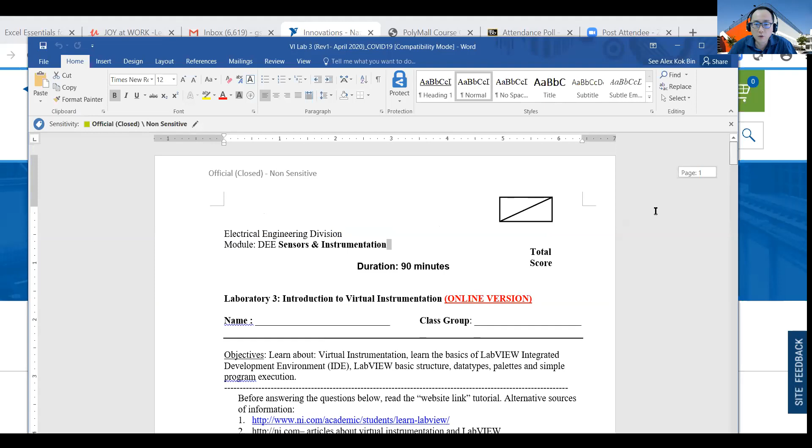I think Mick and who, right? Mr. Ho. Okay, you all just came in, some of you just came in, 2 of you. Yeah, let me mark your attendance first. You have to do your attendance for Mr. Ho and Mick. Okay, mark present. Okay, Mr. Sharu just came in also, just a moment, Mr. Sharu. Okay, Mr. Ching is not here - Ching Kok Hong, are you here? Mr. Ching, not here, Ching Kok Hong, not here, okay. This Mr. Ashraf also not here. Ashraf, okay, never mind.

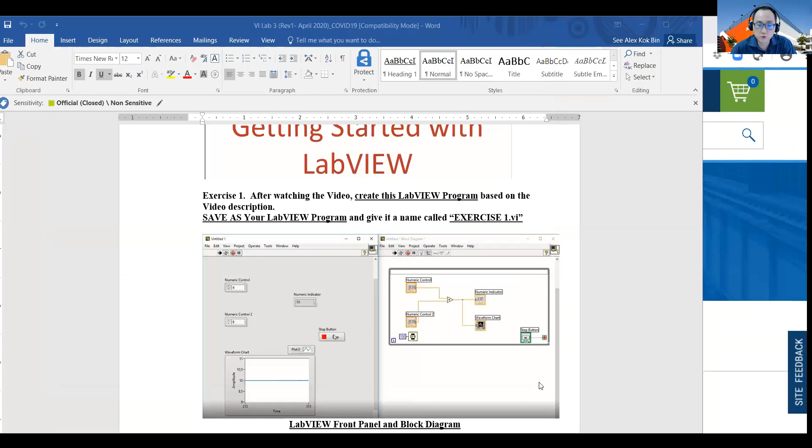VI stands for virtual instrument. Click on this thing called New VI, the first one. Click on this. VI stands for virtual instrument, just for you to note.

I think you should be able to see this and this. You see two windows, right? I believe you all see two windows - one a sort of gray window, and another one a white color window. Let me minimize my lab sheet to make it cleaner, and go to the back and minimize this one first. So you all see something like this, I believe. Am I right? I'll bring down the message box. Okay good, so you all can see.

Now let me give you a run-through introduction. This thing that I'm going to type here, you don't have to do this now, just watch first. You can open up first. At the same time, if you can, put my screen at a small area so you can see. Then open up your system - I'm using two screens, sorry. I know you're looking at your laptop, maybe you've got something different, but anyway I'm looking at two screens. So just to introduce, on this side here, right.

Maybe before that, VI stands for virtual instrument. Just to share with you, virtual instrument is a program. The reason why they call it virtual is because later you will understand that you can create the LabVIEW front panel, almost mimicking an instrument, which is very, very powerful. Now, of course, this is just for reference - what is LabVIEW? LabVIEW is an acronym, it stands for Laboratory Virtual Instrument Engineering Workbench.

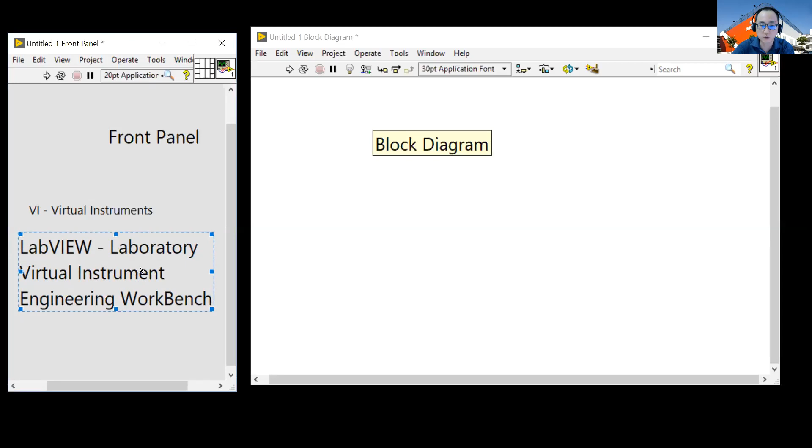In fact, I know some people in the chemistry lab, they use LabVIEW to do some automation and data acquisition. You know, now government talking about robotics, automation and so on. So it's also one of the very powerful tools.

So VI stands for a virtual instrument. You will see in a short while why virtual instrument.

Now, what you see on this screen, the gray one, if you look at the top it also tells you already, right? It's called Untitled One, and this is a front panel. On this side here is called a block diagram. You see, the white color is called the block diagram.

So maybe if you can follow me a bit, okay, let's do this. Can you right click on your mouse? Now what you can do is go to Windows, and do tile left and right. Can you do that? Maybe you do that.

I don't want to do that now because for myself, when I do that, the top part of the window will be blocked by my Zoom. That data I cannot minimize, it's a bit troublesome. So I thought I don't do it. You can do that on your side.

Okay, go to tile left and right. Click on this one. Go to Windows, tile left right. So you have the front panel on the left side and the block diagram on the right hand side, side by side.

Now some people like, you can tile up and down also. You all can try. I'm not going to do that, but you try that. You can tile up and down, so you got one at the top, one at the bottom.

Okay, so now in LabVIEW, there are three main palettes. Let me introduce to you first. So these are the terms that you need to be familiar with.

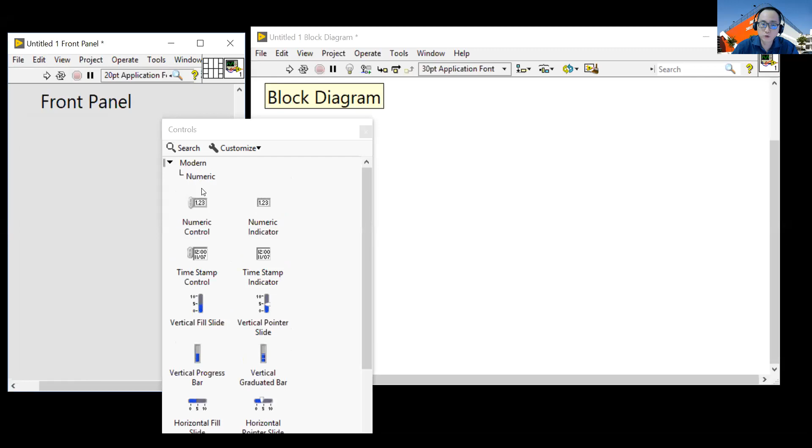So for example, okay, let me release this first. Okay, what do you all see? Can I ask you a simple question? Can you all locate for me a thermometer?

Go to the first palette called numeric. Can you locate one thing called thermometer? I need to check something first. I want to make sure that you are all seeing the same thing. So you drop a thermometer, right?

Now tell me, if possible, if you drop the thermometer right on the front panel, now what do you see on the block diagram? Do you all see this? Do you see this? I call this, you see this object, right? Okay, I call this A.

Now, or do you see icon? Or do you see this?

Okay, maybe you all put in your chat just to make sure. I believe you all are seeing B. That means the icon. Are you seeing icon B, right? Icon, right? This is called icon.

The thing that you see now, this thermometer shape, is called icon. Am I right? Just throw your comments inside your chat. Are you all seeing icon? I believe so. Icon, right? Is it correct? Just type yes if you're seeing icon.

Okay, let's help you set up a bit. Currently the default is checked as icon, which is not very good. In LabVIEW, we try not to see icons because later on you'll need space.

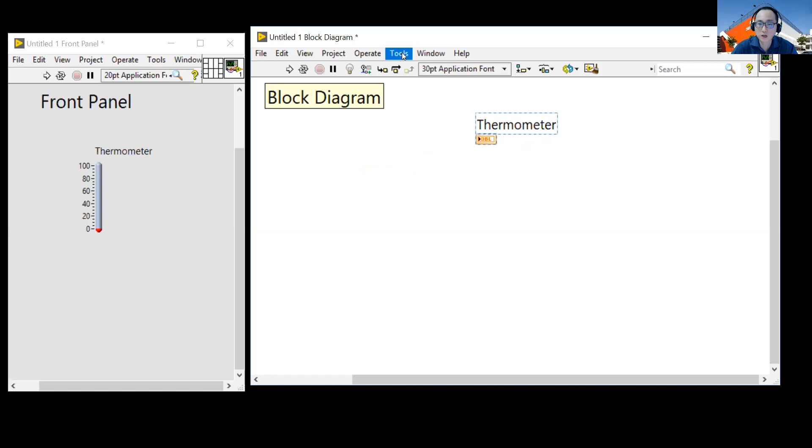So do this together with me. Go to Tools, then go to Options, right at the bottom there. There's this thing called Options. Tools, then Options, click on it please.

If you're there already, you'll see this window pop out. Go to block diagram. Now notice that for this setting, mine is unchecked. I need this option, called 'place front panel terminals as icons' - I want you to uncheck that one.

Go and uncheck this option, 'place front panel terminals as icons'. Okay, uncheck, done. If you're done already, please give some response in the chat - maybe put done, yes, or Y.

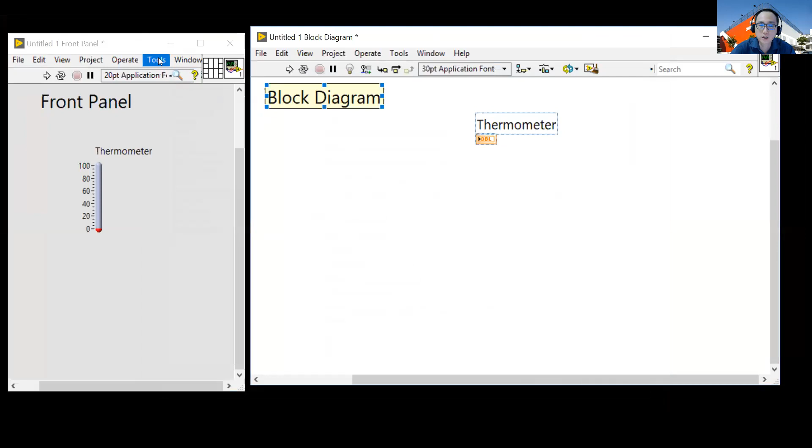Do we need to go to block diagram? No need, go to Tools on the Windows side. Let me show you again - go to Tools, yes. This is block diagram, right? Yes, correct, you can go to Tools here, then Options.

What category do you select on my screen? Look here. Oh, block - okay that is the block diagram category, you're right. Go to block diagram, then uncheck the first option. Okay, good.

So the program will auto save every minute. Make sure you do these two things for now. If that's okay already, just click OK to save the setting.

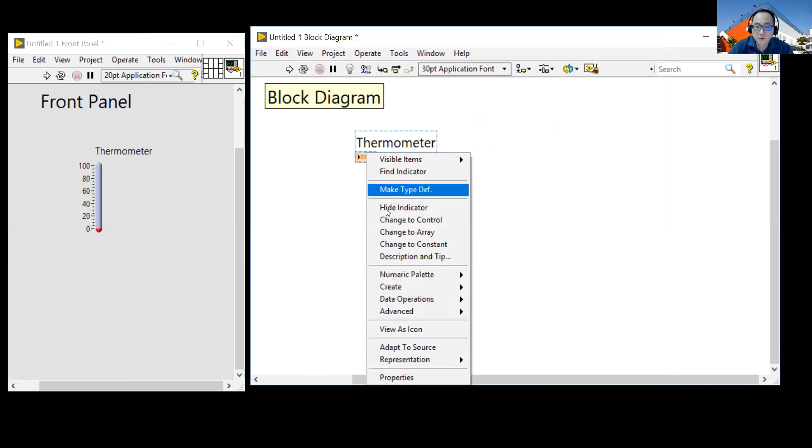Click OK, done. Now, some of you had your first thermometer set up like that - don't do anything, just watch further. Now I want you to put another thermometer. Go back to the front panel, right click on your mouse, go to Numeric, and drop another thermometer indicator.

Drop it, and you should see it just like before, but now in a different area. Make sure everybody sees this first, because this setting is quite important - although very basic, it matters later, because as your program grows you'll need the space.

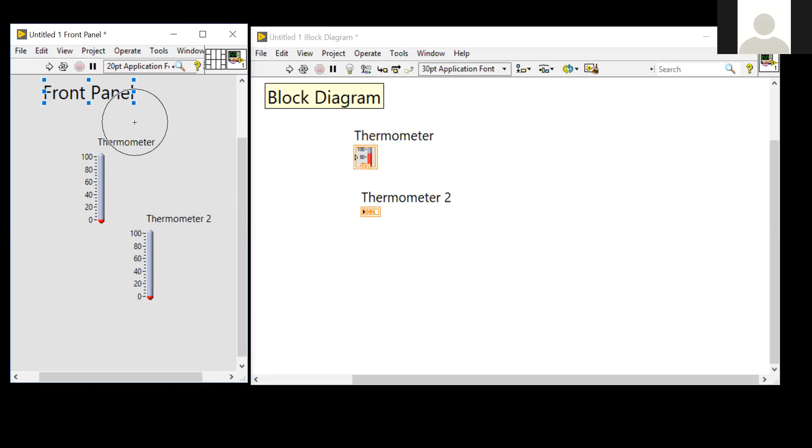Okay, drop another thermometer. Go to front panel - if you don't have this, it's just a normal thermometer. Right click on your mouse - this will launch the control palette. Go to Numeric, then go to Thermometer, click on it and drop it inside the front panel.

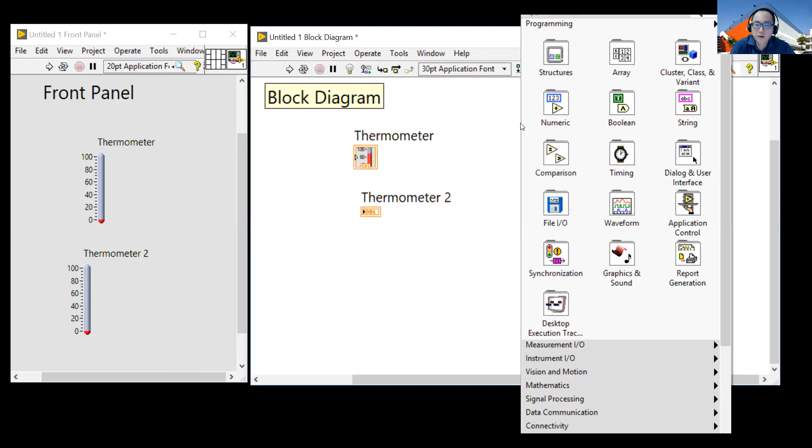Don't have it? I think it's at my block view - not at the block diagram, it must be at the front panel. Right click. The block diagram is a different thing - if you right click while your mouse is at the block diagram, it brings up a different palette called the function palette.

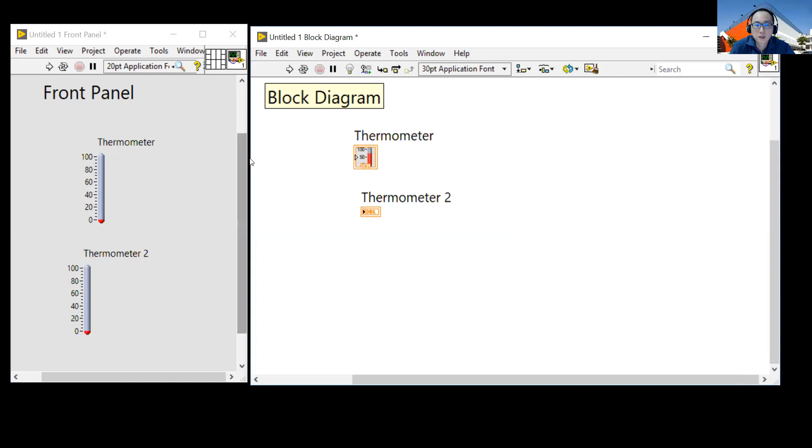But what we want is the front control palette, because whatever you do is all at my block diagram. Where's your front panel? Go to Windows, tile left and right.

Go to Windows, tile left and right - try that. I did tile left and right, but I only see my thermometer as DBL. Then the front panel is the normal thermometer we see, the one under Numeric there.

Maybe look at my screen. I'm looking at your screen. Any other people, anyone got some issue? Mr. Ashraf, are you there?

Let's wait for a few seconds. Okay.

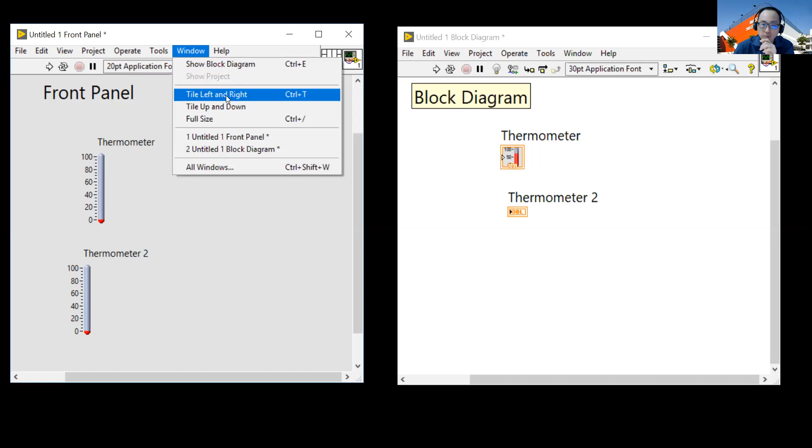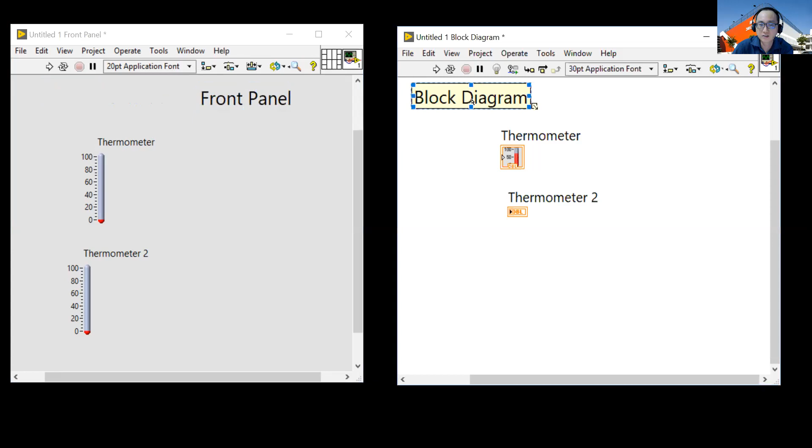You need to see your front panel. Go to Windows, tile left and right. You should see the front panel. This thing, don't worry about these two texts here, it's not supposed to be there. What you see should be blank like that.

I typed the letter into it. Can you see now, Miss Lee? Mine doesn't have it. I do. Mine is different from yours. You want to share your screen? How do I share? You do it.

You can show it, but you'll be sharing to everybody. See, because I really cannot do anything. Okay, you share your screen. How do I share from here? At the bottom there's one green colored thing called share screen. I shared it, but where is the view? This is the one, you see?

Do you see it? Do you see it? Okay yeah, what you need to do - I can see your screen.

Okay, can you go to Windows? Can you click at the top there, Windows? At the top, the menu bar there. Front panel or block diagram? Doesn't matter, either one. Go to Windows, tile left and right. Move your mouse to the...

Are you using two screens, or are you using one computer? I have one computer only. One computer, then you should be seeing all together. Go to Windows, go to Windows at the top there. Yes, tile left and right, Control T. Tile left and right there. Control T, yes correct, click on that one. Yes, click.

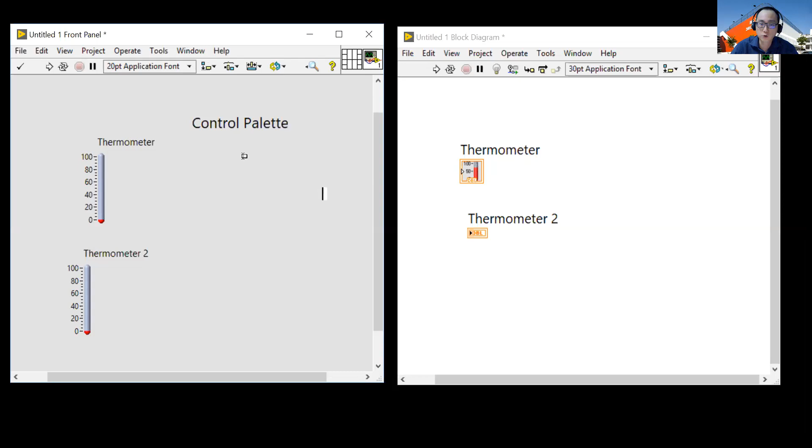There are only 3 tools, 3 palettes you need to use in this LabVIEW. This is called the control palette. To get the control palette, right click on your mouse when you are at the front panel.

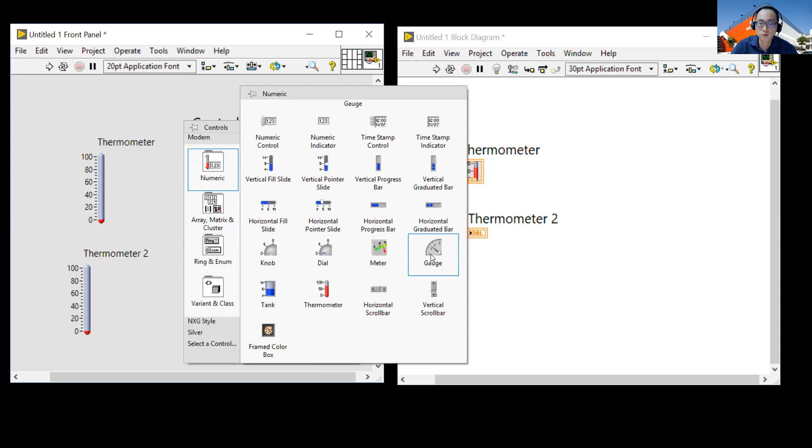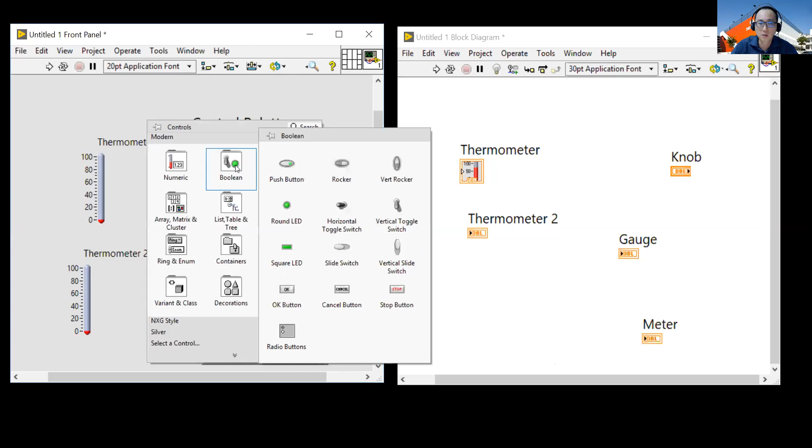What's the purpose of the control palette? It's for you to drag and drop objects. For example, I can go to numeric and drop things like knobs, or maybe a meter. I'm just randomly dropping some things. I got switches, I can put some switches, and so on.

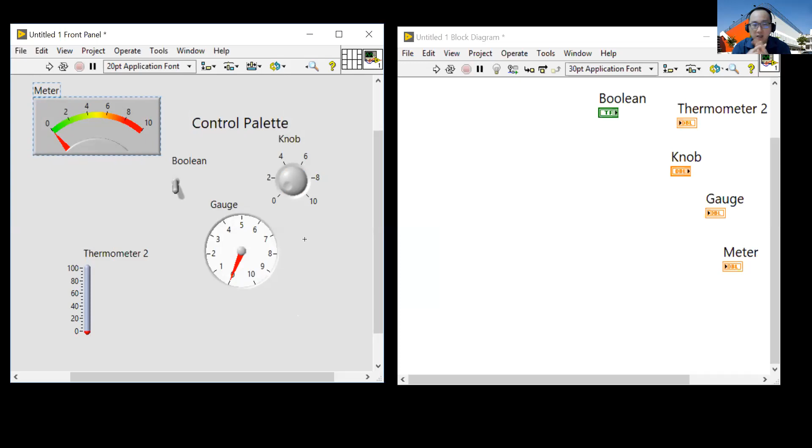When I drop these objects on my front panel, correspondingly that object also appears in the block diagram, with the same name as the object on the front panel. This mimics an instrument. On the front panel, you can put all these things to actually mimic an instrument. I believe at work you all use some kind of instrument, and the most common one is the oscilloscope. There are many other types of instruments we use.

Now what is the function of the block diagram? If you right click on it, I need your help. Can you right click on your mouse? On the block diagram, right click and you will draw out this thing called the function palette. Just right click on your mouse, and you will see various tools that are graphically available.

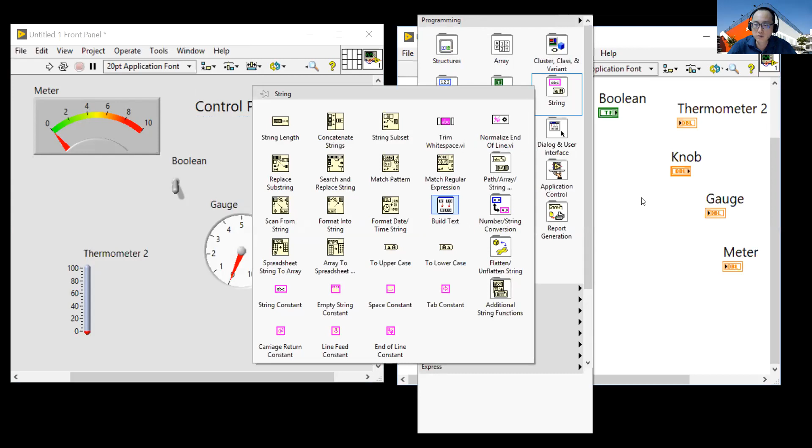I think the nice thing about LabVIEW, as compared to other types of programming languages, is that it's very simple and graphical in nature. It's very appealing and easy to use. Later you will see why.

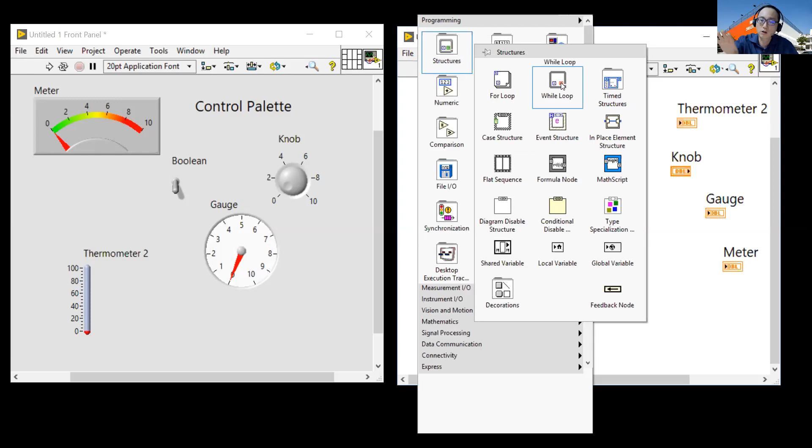Now I have all the different structures like loops - you've got the for loop, while loop, case structure. We may not have time to do everything, but we will do some of the more important ones. Of course there are also third-party add-on libraries if you need to use them. For example, if I want to connect to an instrument, maybe a flow meter, I can just download the driver, put it inside here, and then straight away connect and use it. Very, very rapid.

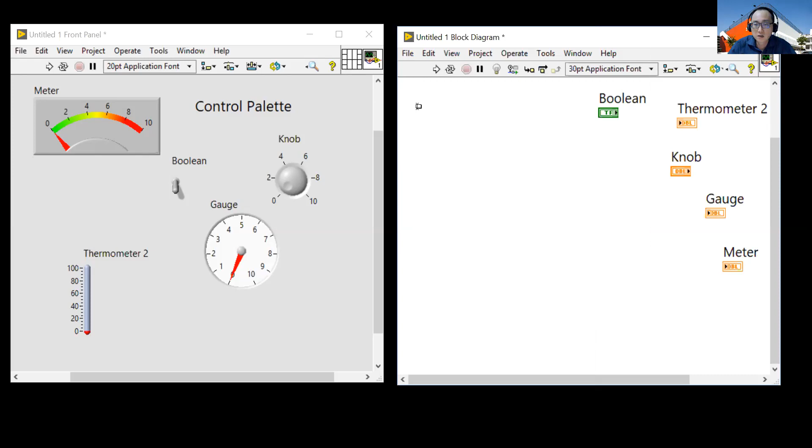So the next thing I just shared with you was this thing called the tools palette. Now let's see - I just randomly dropped the objects here, all these are random, so maybe I'll just delete them first.

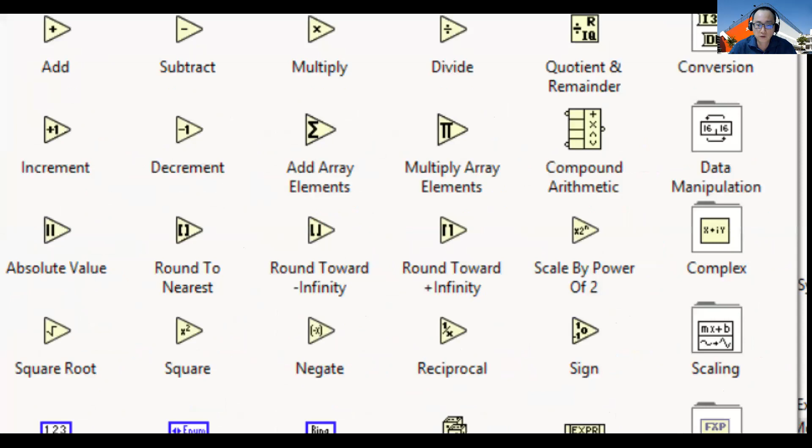On the function palette, you've got all the different functions - structures, arrays, and so on and so forth, and the arithmetic. You notice that the functions are all already there, a whole bunch of them. You can do all the different things that we need. Most of the time, your engineering problem can be solved with the tools that are there, and you can add on tools also.

So this is the tools palette I showed you just now. In order to get the tools palette, you press the shift key and right click on your mouse.

Let's maybe do something simple. Can you help me, students - can you drop for me this thing called the for loop? Can you look for this for loop? Do you all see this palette? Can you all see this thing? Help me maybe drop a for loop - just drag and drop one for loop, something like this.

Okay, you will put this for loop, right? Let's try a simple one - maybe a for loop, this is a for.

Now you can always do some basic things. There's this very useful thing called the question mark - do you see this yellow question mark? This is called the context help window. Can you click on that little yellow color window? Click on this, then mouse over to the object that you want, and this context help window will pop up. If I click on this, then mouse over, it will explain to you what this for loop is.

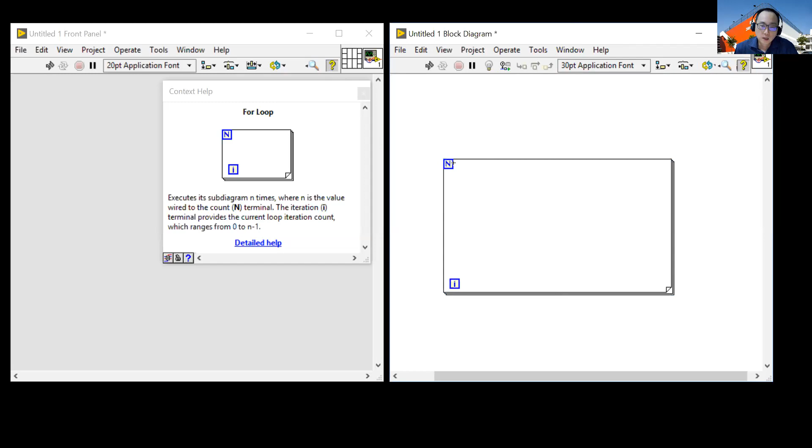Of course you can drop other objects too - maybe now we drop another structure called the while loop. Drag and drop it. When you mouse over here, you can click on the detail help if you need to. Click on this, while loop, and it will explain to you what this loop does. Let's see if I click on it, it will launch.

Okay, wait a while, it will launch. There, okay, so I show you, this is what I did.

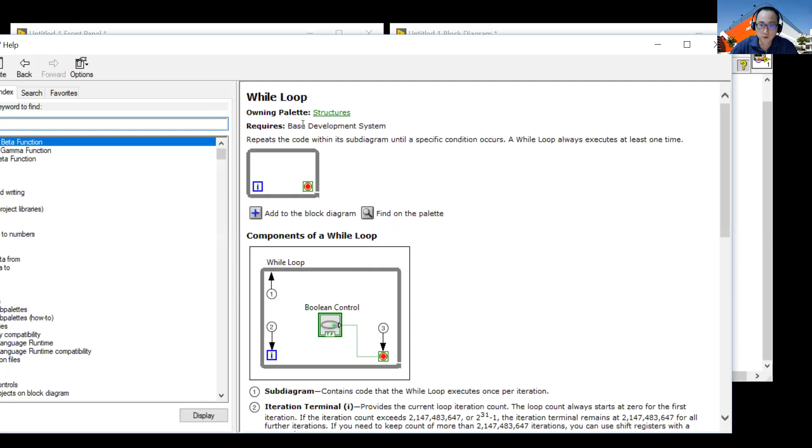I click on the detail help, so he explained to me, okay, what is this thing. So if you can navigate slowly, in your time, you can see, he explained to you.

This is a while loop, right? Now, the while loop has this thing called the iteration terminal, the I - that tells you how many times the thing runs. And then there's also this thing called the condition terminal. In order to stop this loop, you need a button, a stop button, for example.

So maybe, okay, this one you can take a look. So let's say, for example, this while loop. I can close the context help if I don't need to use it.

Okay, so I'm going to... now, let's say, when you have this while loop, you can put this while loop here. Now, let's also right click - can you right click on your mouse at the block diagram here? Now, let's go to numeric.

Okay, maybe I want to do very simple things. I just want to add up two numbers. So I need your help - go to numeric, go to the plus, go to the add function. Select the function and drop it inside here. Then go to visible item, turn on the label.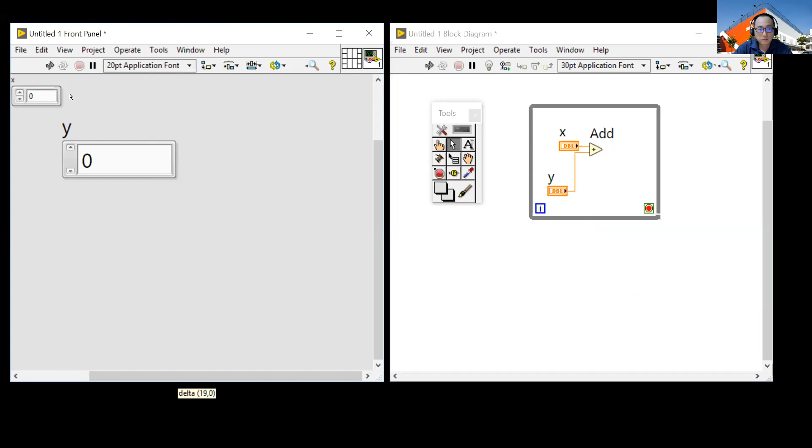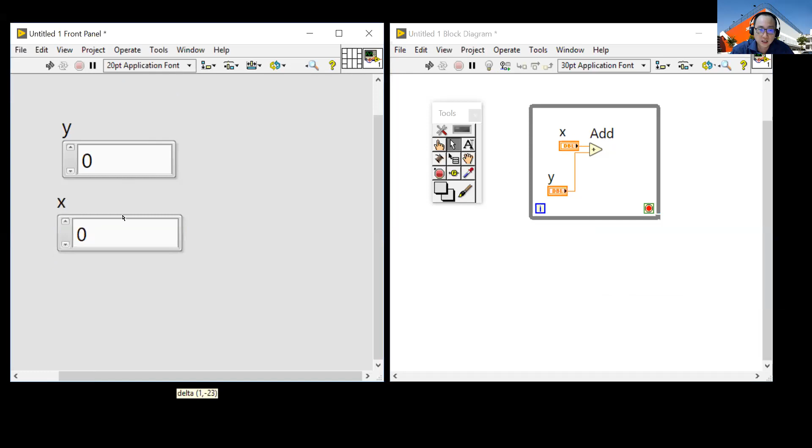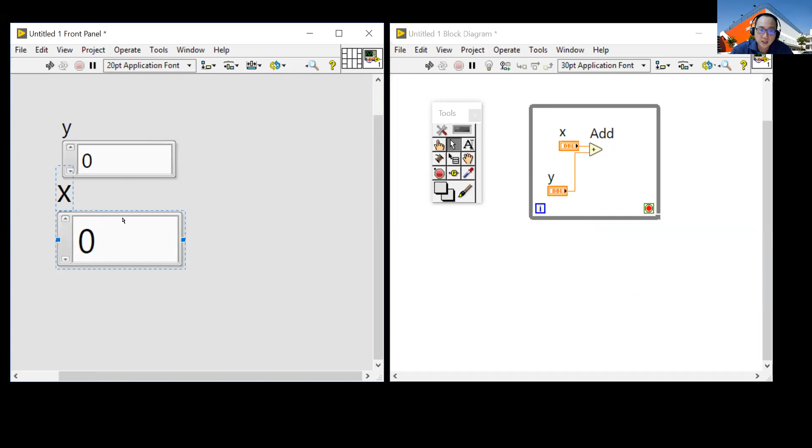So I'm going to increase the size a bit. If you want to do like mine, make your object bigger for the sake of the presentation, select the object and press Control plus. Hold the plus key, keep pressing Control plus, and the object will resize bigger. Hold Control and press minus to reduce the size.

So I've got one X, one Y. Do you see? I want to just quickly add up these two numbers and then display the output. Very simple. Then I've got the last thing to do.

I need to wire this thing. Bring the mouse to the output terminal there. Look at my screen — the output is X plus Y. So what I'm going to do is mouse over to here, right click on my mouse again, create...

...indicator this time. An indicator is a display. Remember, a control is a user input, while an indicator is a display object. So this time around, I'm going to do it one more time and show you: mouse over to the output there, which shows X plus Y, right click on your mouse, create indicator.

So now I've got this next terminal already. I've got three terminals: X plus Y.

Now one more thing I need to do — the thing still shows a broken arrow. Do you see? If your program is clean, the arrow is removed and shows a clean white arrow. This one still has an error. Let's try clicking on this broken arrow to show you.

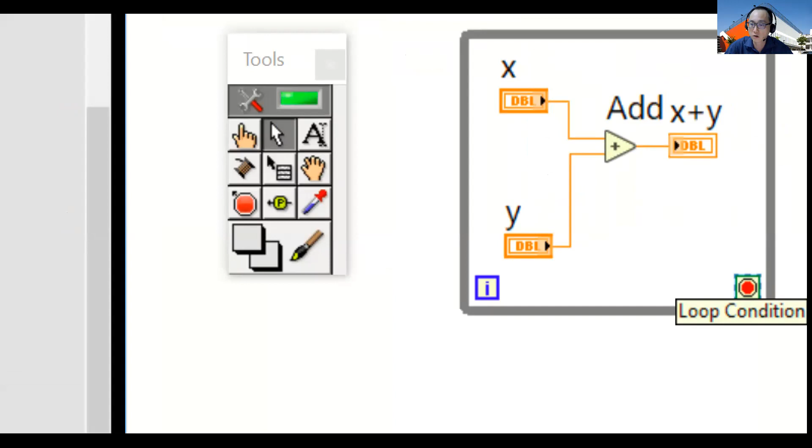So I need your help. Can you help me? Mouse your thing over to here — actually I'm using the wiring tool, this little wiring tool. Of course, if you use the automatic tool, it's easier. You mouse over here, right click on your mouse. Bring it to the loop condition terminal, the red dot there, the red circle, at the bottom right-hand corner. This is the loop condition terminal, and it all needs to be wired.

So what you need to do is right click on this, create a control. It will create for you a stop button.

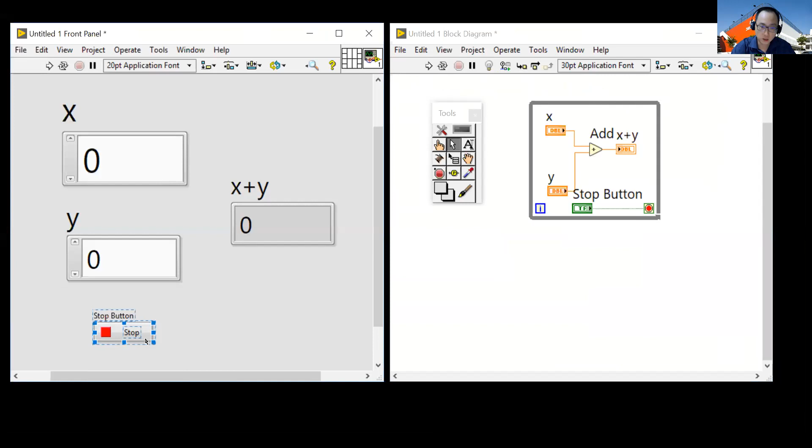Okay, here we are. So now I have completed the code. Now you notice that it's quite seamless to do, to be honest. After a while, you get the hang of it. It's quite easy. Okay, so basically now I want to add, so I got the stop button here.

Okay, now once your program is neat and tidy and error-free, LabVIEW automatically shows you that the run button is clean. So when I zoom in, the run arrow now is a clean white arrow. That means your program has no bugs, no errors, ready to run, ready to execute. Okay, so this is one of the key features of using LabVIEW.

Or where to get the stop button. Let me repeat, okay, I saw your question by Sharu. Okay, where to get the stop button? Let me repeat. Okay, over here, right? Now, can you bring your wiring tool, or if you use the automatic tool, it's easier.

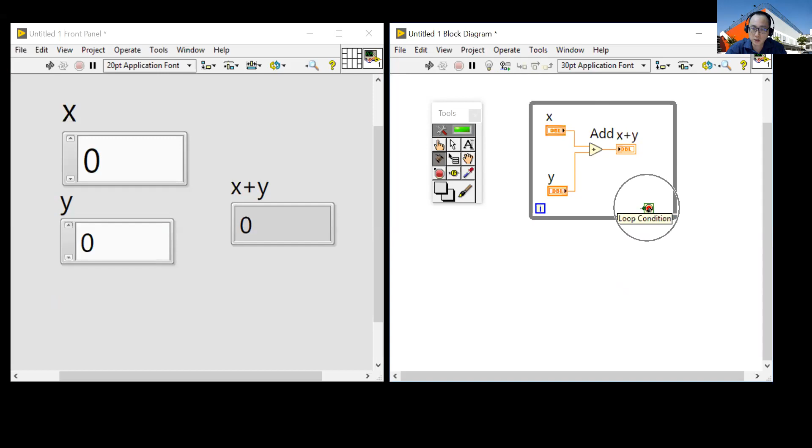Bring your cursor to the loop condition terminal here, as you can see on my screen. Right click on your mouse. Once your cursor, your wiring tool is at the terminal already, your thing will start to flash. That means you need to do something, right? The next action is to right click on your mouse, then create a control. Create control, create a control, right click, create control. You will get the stop button.

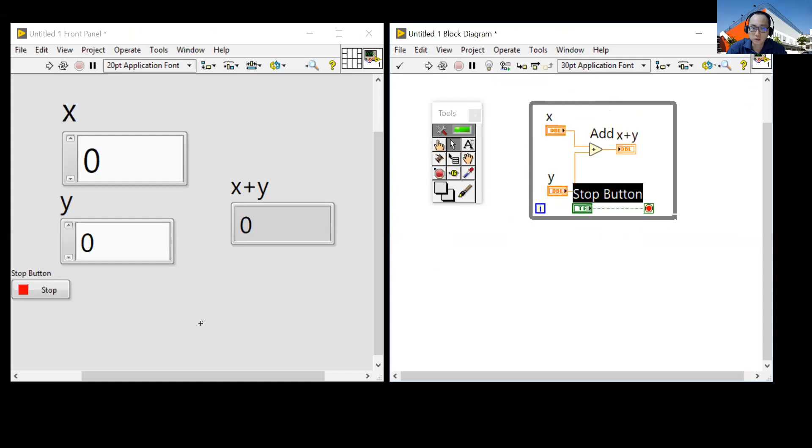I hope that can. Okay, good. All right. Okay, so I got a stop button. Okay, very quickly. Well, I took some time to explain a bit on the basics, but it will help you.

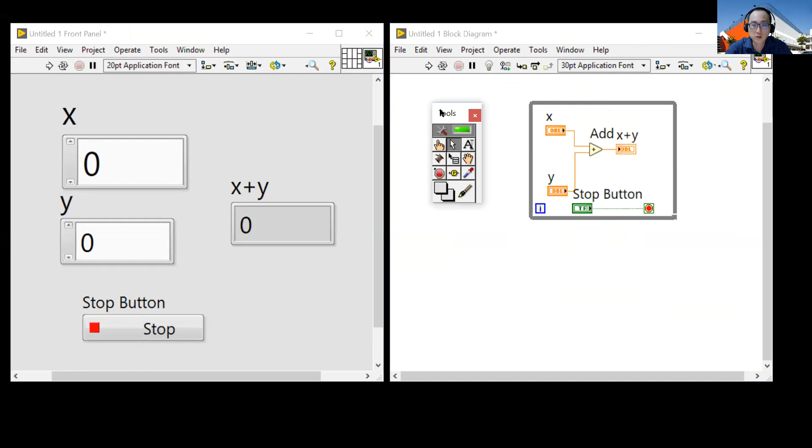Okay, now to run this thing, you can click on this. Okay, still on the automatic tool. Make sure you can switch on the auto tool. Now you can use this little index finger, it's called the operate tool.

You can increase this value. You can use the little finger. Select this little index finger. Do you see or not? The tools, right? The little finger, the index finger with a small thumb there, right? Okay, this one allows you to operate on this thing. You can click on this thing.

Say, let's say, for example, I want 3 + 4. So I select the X, I increase. There's a small scroll key here, right? You can go up or down, scroll up. Or you can type in, if you want, you can just type in. I want 20 + 4. Okay, you just use the tool to type in.

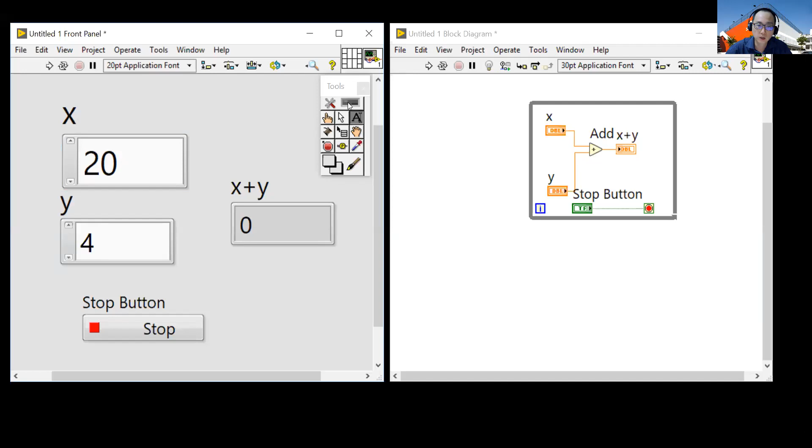You can use the A tool, A for text tool. You can type inside the box. 20 + 4, click run. Okay, you get 24, very simple.

Now the program keeps running continuously, until you hit the stop button. Okay, you see the arrow run, right? This is called the running, the program is executing. So it's running continuously, until you hit the stop button. So you click stop, it will terminate the code.

Mr. Lau, okay, Ken. So far, this is the simple code that I just shared with you. Now, one last thing maybe I share before I let you all go. Actually, you all need to do the lab, you have to follow the video. But I just took a bit of extra time already now. So the other thing you want to run, okay, one last thing before I let you all go off. But you all need to do the lab 3.

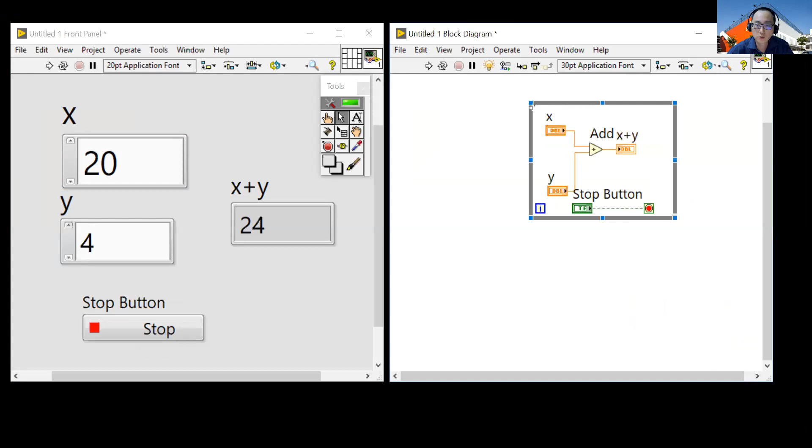Okay, so what do I mean? Now if I click on, you can try that. You click on your highlight execution. I just try to move the wires further down a bit. Okay, I click on this highlight execution now. Then you click on the run button.

Now you will see that LabVIEW allows you to see the data on the wire flowing. This is one of the beauties of LabVIEW. You can literally see the code changing. Now I can change the value.

Let's see if I go to my front panel here. I increase the value, you will see the code change on the fly. Notice when you turn on this highlight execution, it allows you to see the code, which is a very, very nice thing, I feel.

You can use this for troubleshooting. If you want to troubleshoot and cannot see what's going on, you can turn on this light bulb, called the highlight execution. If you want, you can see it; if you don't want, you can switch it off and it will run very quickly.

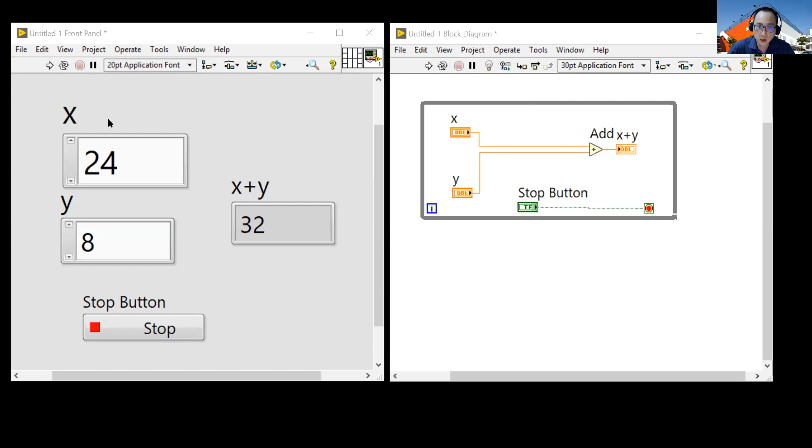They will ask you what you want to save. Now, one general rule of thumb: some of you may wonder, sir, when you save, I've got two things, the front panel and the block diagram. Do I save both, or what? No, when you save a LabVIEW program, you save one file, it saves both together.

You understand? The file will be saved together, with one file name, because these two are the same thing, they have to work together. So maybe what you can do, can you save now? Go to File, Save As. Okay, so you want to save, maybe call this one 'examples'. Can you save first?

Let me close this one first. Yeah, you save it as something called 'example', the extension is .vi. Save the file, create a folder first, then save as .vi. Now you save it, you will save everything, it will save all.

And at the same time, for this lab, I want you all to take your time to do it. Don't worry, you can submit next week, but try to do it, don't delay. So you follow through the self-paced learning video there.

The professor will teach you how to make this thing, the while loop and all those things. There are more things that you can get, how to get started. He will teach you. Inside there are 3 small videos that you should watch. How to get started, which I think I explained quite a bit, I covered quite a bit.

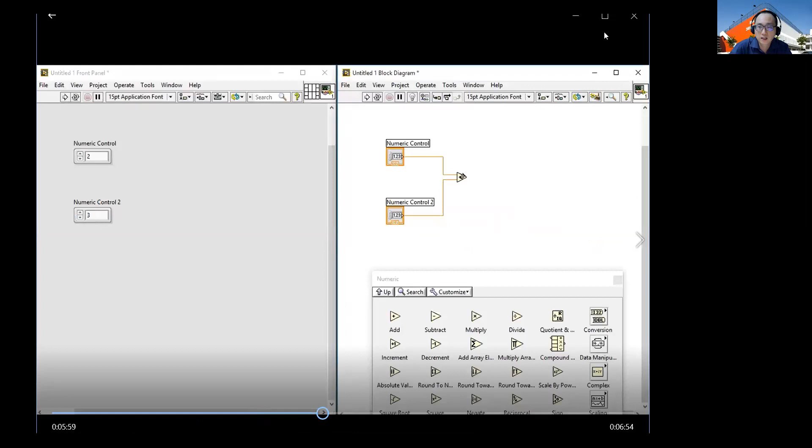Okay, then he starts to show you. Something like that. Correct, this part I already showed. I already done this part. So I think I stopped showing you the video.

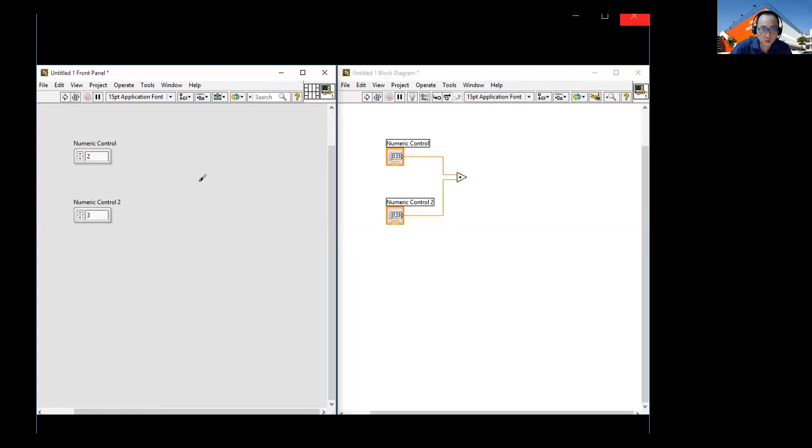I think it should be okay. The icon has nothing, just share. This watch video, this is just an icon. There's nothing on it, there's no link. The link is this link. This is the URL link. Don't click on this, click on this watch video. There's nothing on it, okay, just click on this link. Copy this URL link and then you watch the video from there.

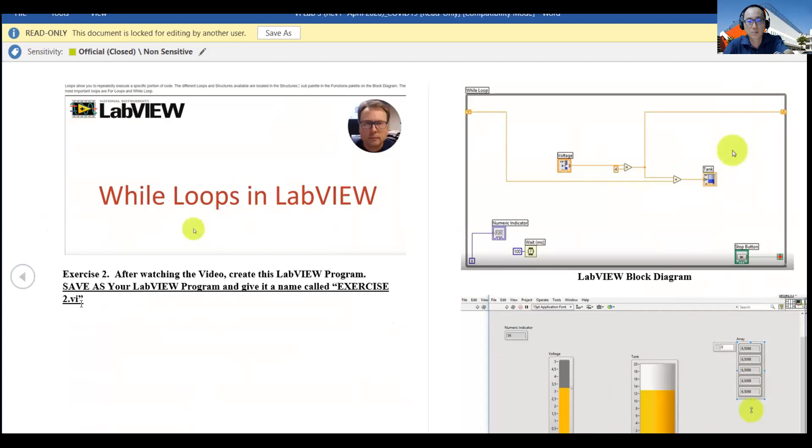All the videos are all there, in sequential order, one after another. So you got to follow along, okay, then try to do the stuff, then you save each one. After you watch the video with the exercise, save the exercise number.

Is it clear? There are 3 exercises in this lab 3: exercise 1, exercise number 2, and exercise number 3. Please complete all, save the exercises with the correct file name, something like exercise 3.vi for example.

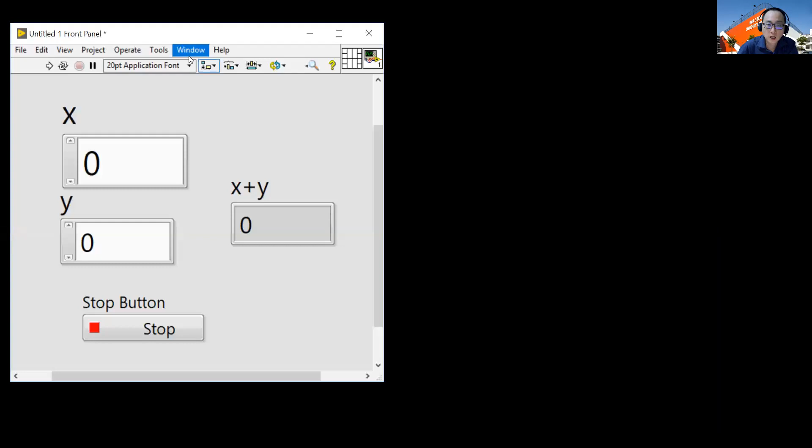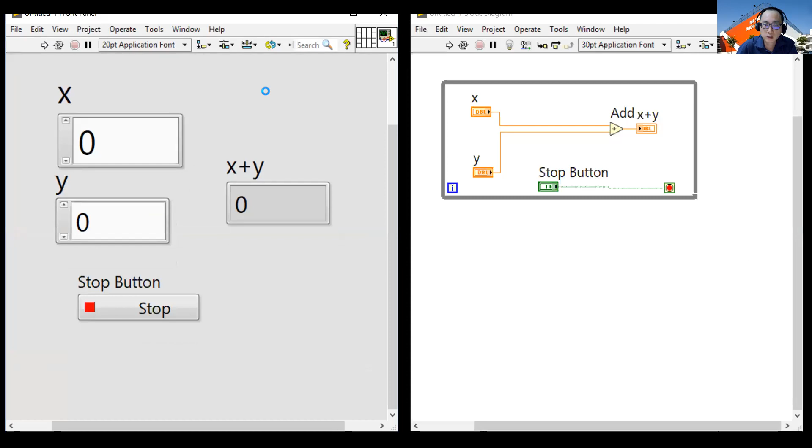John? Okay. Miss Lee, are you still there? She's also okay. The thermometer, right? Yes. Okay, what you do is pretty simple, I just add on from here.

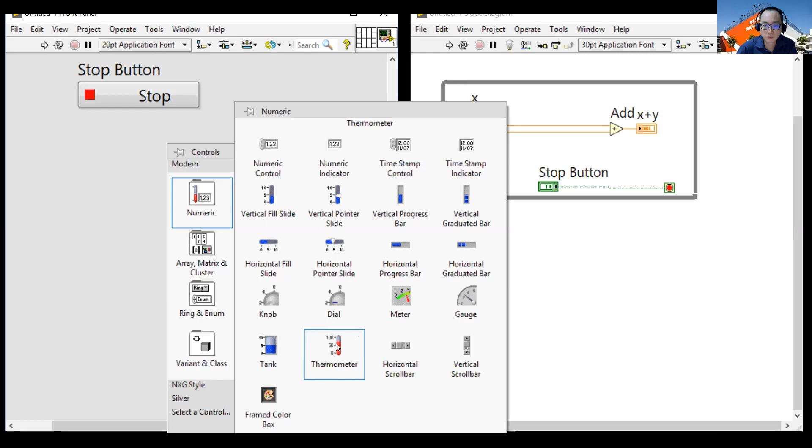You see, okay, what you do is right click on your front panel. Click, you see numeric or not? Do you see this thing, thermometer? Numeric, at the bottom there, the last second row, thermometer. See, look at my screen. You still seeing my screen, right? Can you see the thermometer? Click on the thermometer and drop.

But I think you missed out this part, the setting one, right? Yeah, because I believe your thermometer now looks like this as an icon. Am I right? Yours is like this, right? Sorry, I need to do one more time.

You check for me first, John. Your thermometer, is it like this? On the front, on the block diagram, on the right hand side there. So click on the thermometer one time, one click. Just click, yeah, just left click. It will drop the object already.

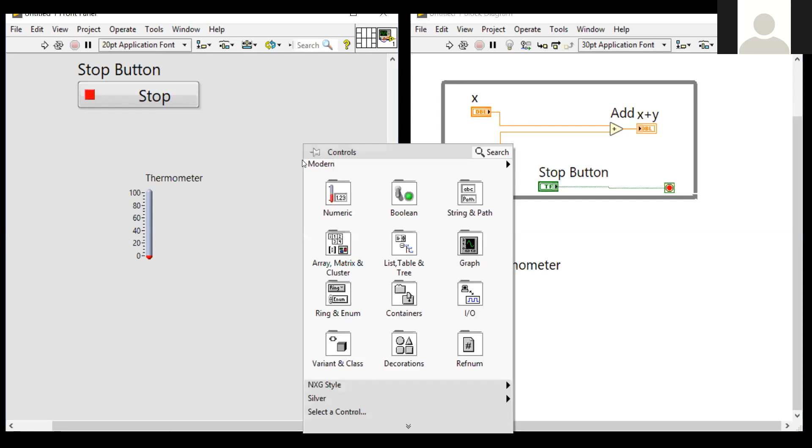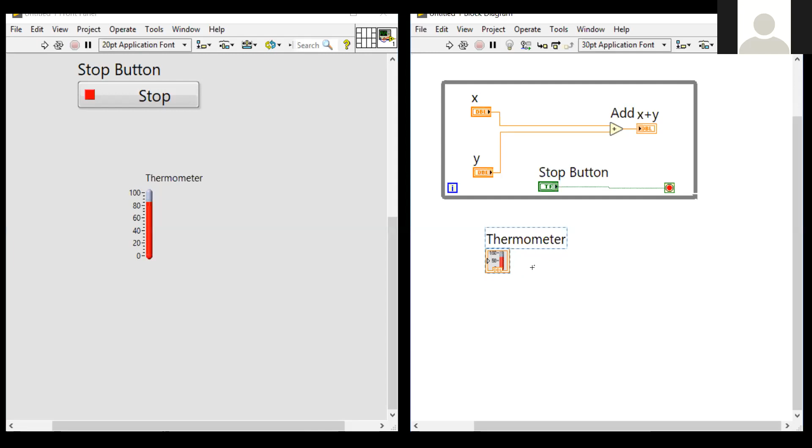Function. So I cannot... what do you mean? Show me your screen here. No, if I stop sharing, you share your screen.

Can you see? Yeah, because you are running, you must stop first. Because now your program is running, you cannot edit. Click on the stop button. Then right click, go to thermometer drop. Your program is running, you cannot edit.

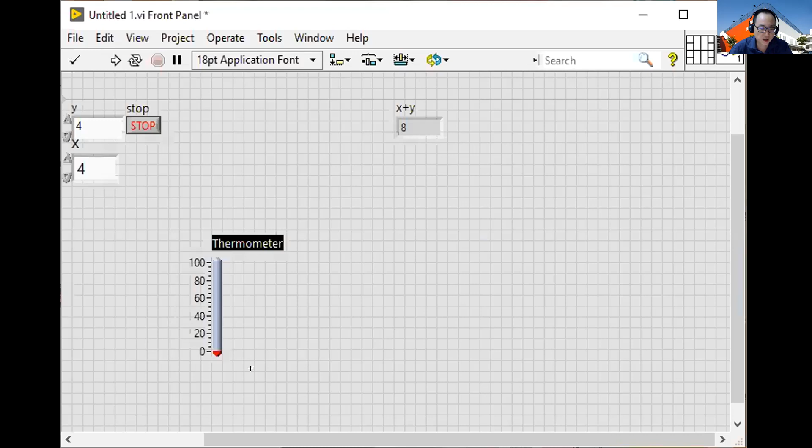Okay, now show me your block diagram. Go to Window at the top there. Press Ctrl T on the keyboard, or you go to Window, at the top of your Windows there, beside your Help.

Beside your Help, okay you go to the Window. No, beside the Help. Yes, go to the next one on the left. Okay, wait, you click on that one. Okay, tile left and right.

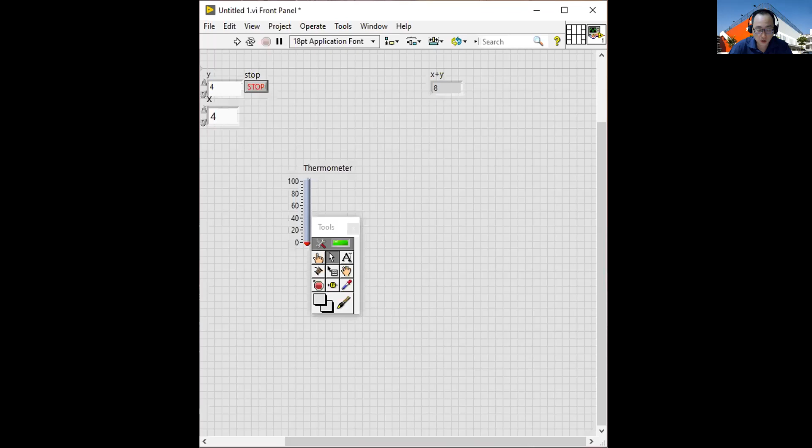Yeah, tile click. Okay, but where is yours? I cannot see the other side. Bring it, I didn't see your block diagram. Wait, stop sharing. I cannot show two, I don't know why. I think I know already.

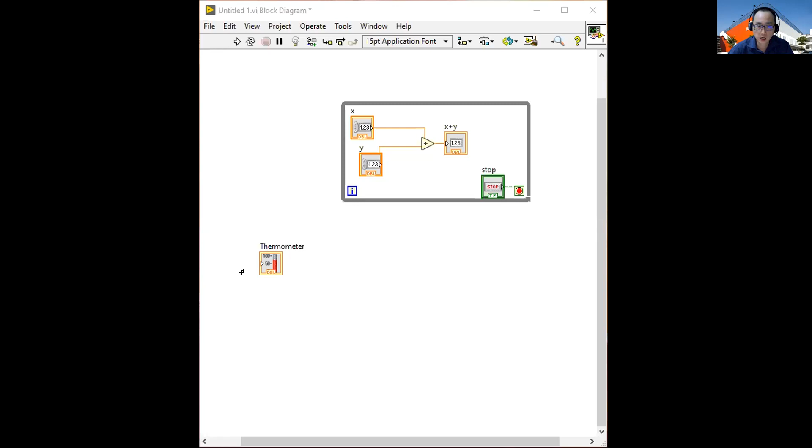Okay, I understand, y'all don't know how to share screen. When you share, you must go to... okay, stop share first. I'll tell you something, can already. This is yours, okay I saw it. I saw yours, okay so what do you do? Okay, never mind, quick one.

Okay, you go, okay I share my screen. Okay, you unshare first. Okay, I share mine. Can I share my screen? Hold on, okay, this is my screen. Can you see my screen?

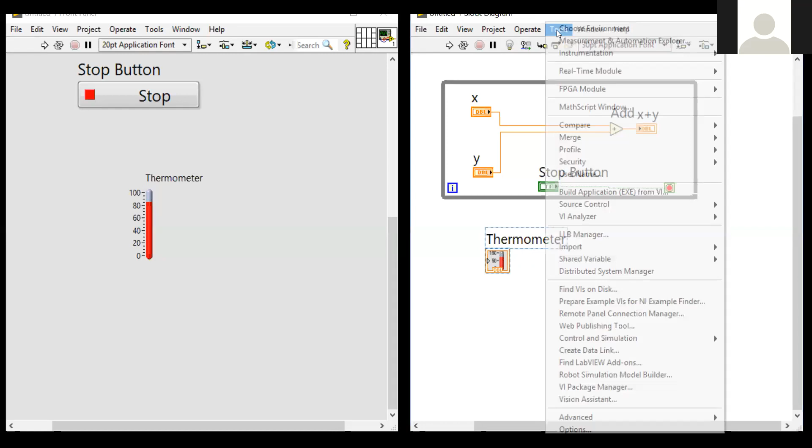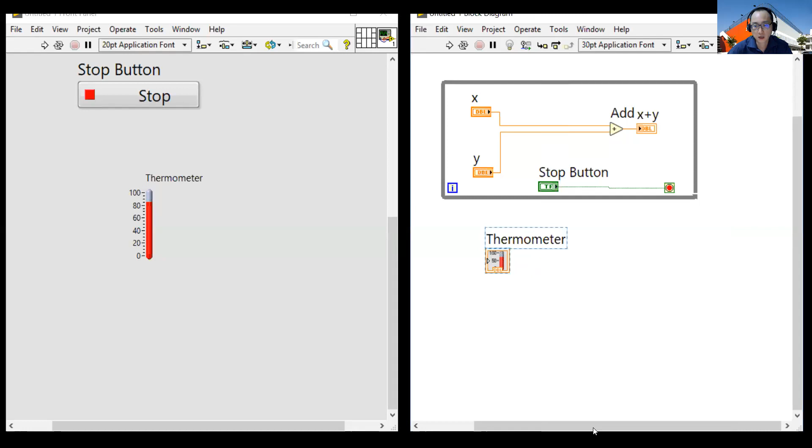Yes. Okay, you go to Windows, go to Tools, go to Tools. Okay, Tools, then you go to Options. Tools, Options, one, yes, can you see? Okay, click on Options. You will launch this window.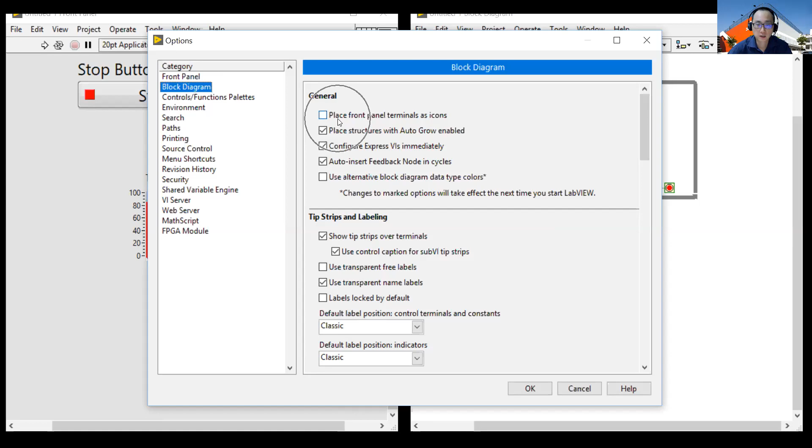Do you see this window? Yeah, okay, you go to Block Diagram. Block diagram. Okay, do you see this terminal unchecked, under the General tab, right? You see, I have one unchecked one called 'Place front panel terminal as icon'. I need you to uncheck that terminal.

Uncheck that box, uncheck it. Yeah, I checked already... uncheck, yes okay, then click OK. It's fine already. Okay, click OK, then okay, already done.

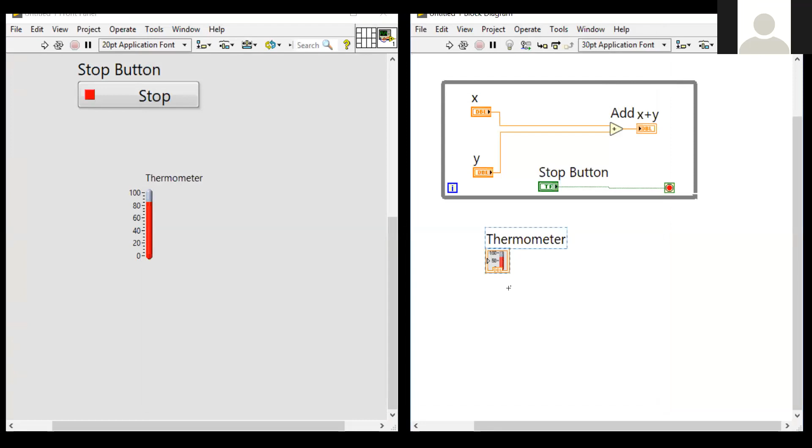So the next time you try to put another thermometer, the default is you put another one, right? The default is an object, not an icon. You try again. Okay, now I try. Okay done, yeah, okay, that's all.

Another thing I missed out just now. You said what? 5 minutes save one time, or 1 minute save one time, that one. Okay lah, okay sorry, I think I missed out that one. You can do that also.

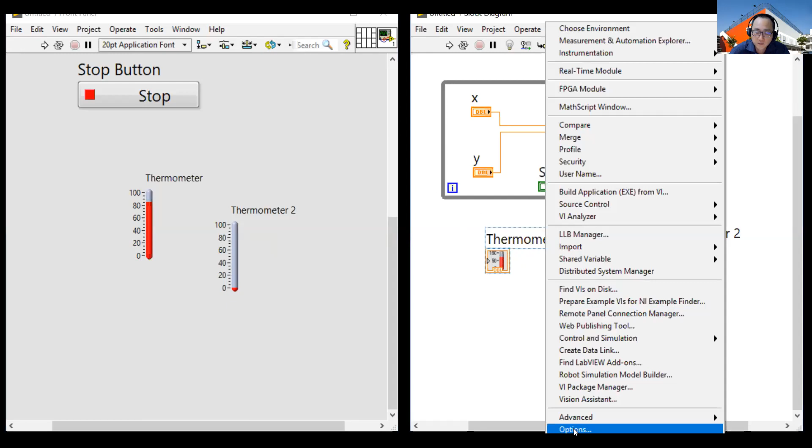You go back again, Tools, Options. Go back to the front page, or go back to the top. No, go back to this one, go back to just now, the Tools, go to the Tools at the menu bar there. Then go to Options, okay, then go to Environment. Sorry, Environment, environment done, okay, environment.

You scroll down, bring the cursor down, scroll, you will see this thing called Saving, Saving VI, change it to 1 minute. Yeah, oh okay, mine is 5 minutes. 5 minutes, right? Change to 1 minute, then click OK, then done.

Right, that's it, change to 1 minute, then click OK. OK means save, save the setting, click OK, done. Okay, done. Okay, most of the things I know already.